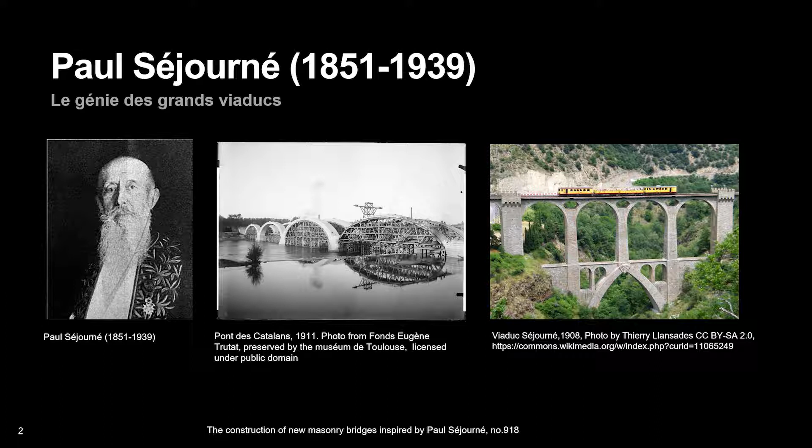Séjourné was a French civil engineer, and is mostly known for his innovations in design and construction of masonry bridges that were built during the first half of the 20th century. And many of his bridges are still standing today.

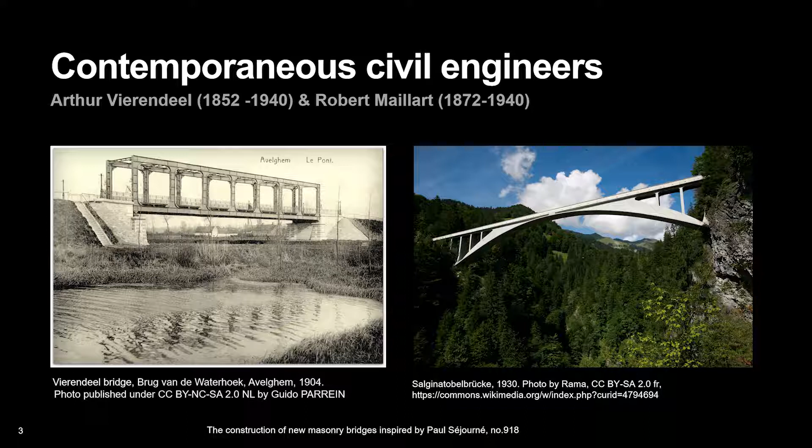Historically, Séjourné's work may have been overshadowed by other well-known civil engineers active at the same time, such as Maillart and Vierendeel, who both pushed the design of bridges in materials that are still considered more modern in steel and concrete. However, Séjourné wrote maybe one of the most extensive works in 6 volumes on masonry bridges and arches, Grandes Voûtes, and also an article on 50 years of progress in the art of designing and building large masonry bridges in 1930.

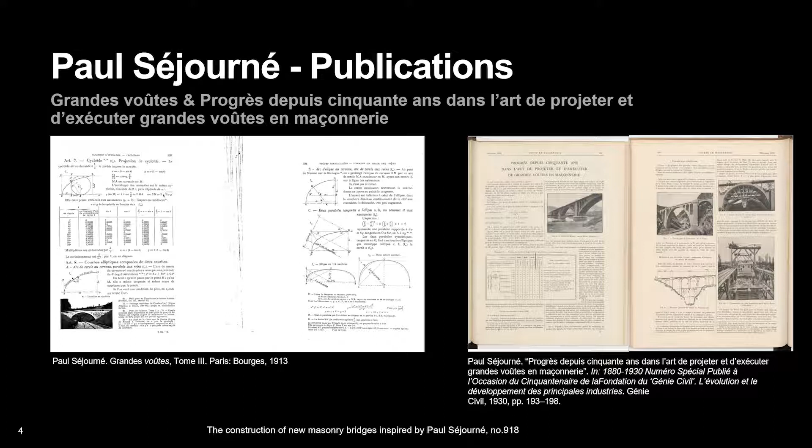Séjourné writes some advantages of masonry compared to concrete in being able to predict the crack patterns and the ease of repair. In concrete, it is difficult or impossible to predict cracks and repair it, he states. However, since the First World War, the manpower has become scarcer and more demanding and less good, he continues. And there are few apprentices, thus making it difficult to build good masonry bridges.

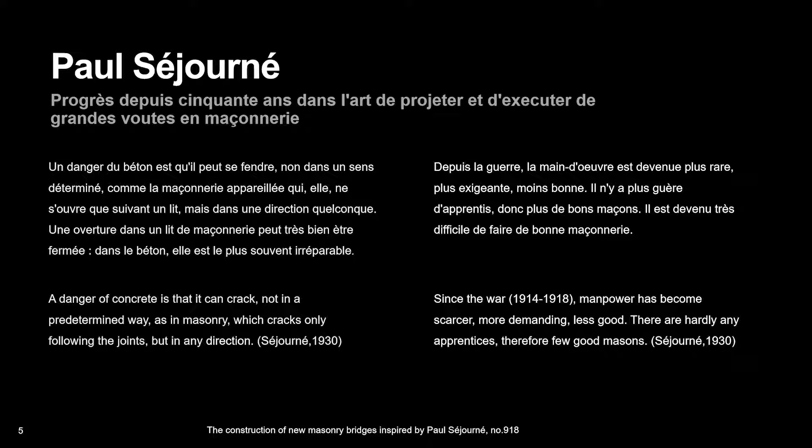Thus, why would there be a future for new masonry bridges, since they are considered expensive to build, and our knowledge and skills relating to the design and analysis and construction of these bridges are still limited. However, there are aspects concerning sustainability that might make us reconsider masonry bridges. One such aspect is that many masonry bridges, such as the Maidenhead Railway Bridge, are still in use and have performed well over time and require relatively little maintenance compared to modern bridges.

And if one looks inside, many of these bridges contain quite a lot of fill material between the arch and the spandrel walls. It can be earth, soil, or stones. At least in Sweden, there is a debate regarding how to handle fill material generated during large infrastructure projects. Using it in the design and construction of new masonry bridges could be one option.

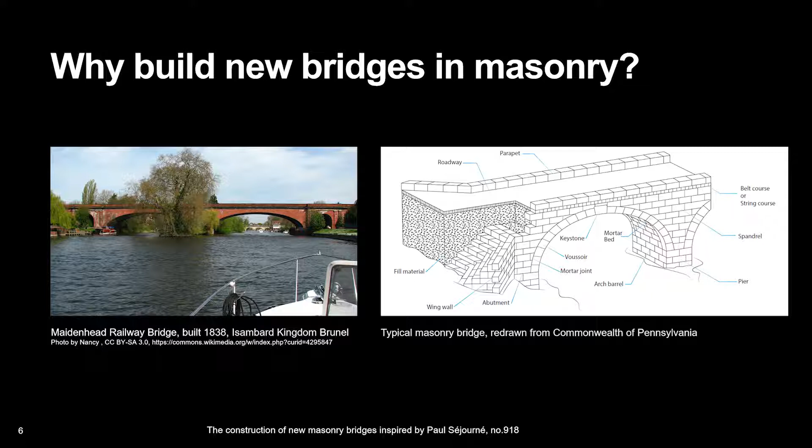The fill spreads the load from the road on the arch, and the weight of the fill stabilizes the arch. So from this perspective, the more fill the better. On the other hand, from the point of view of foundation, the less fill the better. So it will always be a compromise. How does the fill affect the form of the bridge?

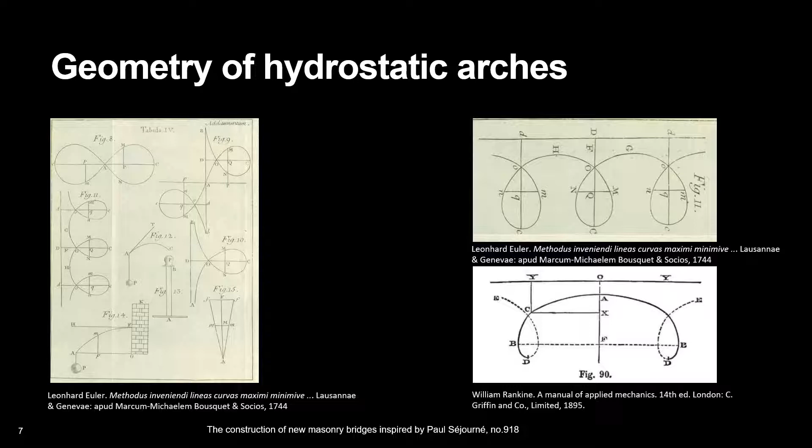If we assume that the load from the fill on the arch is hydrostatic pressure, and we ignore the weight of the arch in comparison to the fill, then the curvature of the arch must be proportional to the vertical distance. The shape of the arch should therefore be that of Euler's elastica. This is also illustrated by Rankine in his famous book, A Manual of Applied Mechanics. Thus, the elliptical-shaped arches with increased curvature near the supports to balance the load from the fill, seen at the Maidenhead Railway Bridge, and to the right, a bridge by Séjourné.

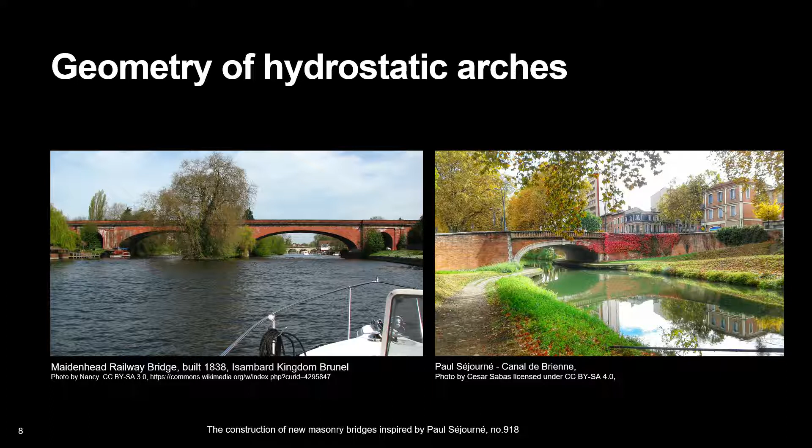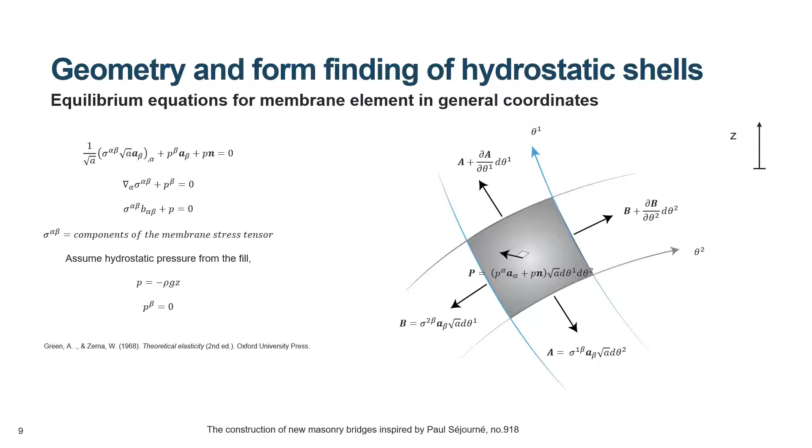The knowledge regarding hydrostatic arches is well known. However, the objective of this paper is to derive the shape of the hydrostatic shell, combining the arch and the spandrel wall. Starting from the membrane theory in general coordinates, assuming hydrostatic pressure from the fill, we then align the principal stresses with the geodesic coordinates, which is a special type of curvilinear coordinates on a surface, where the coordinate curves are geodesics in one direction and orthogonal trajectories in the other. With those geometrical constraints on our grid, we can reformulate the equilibrium equations for our membrane shell.

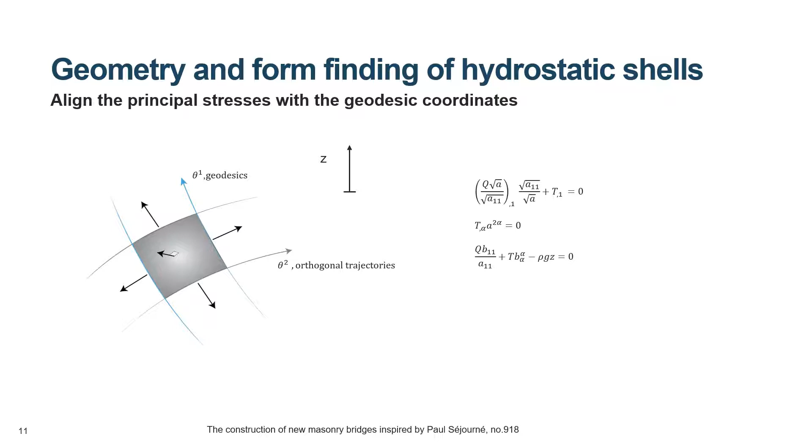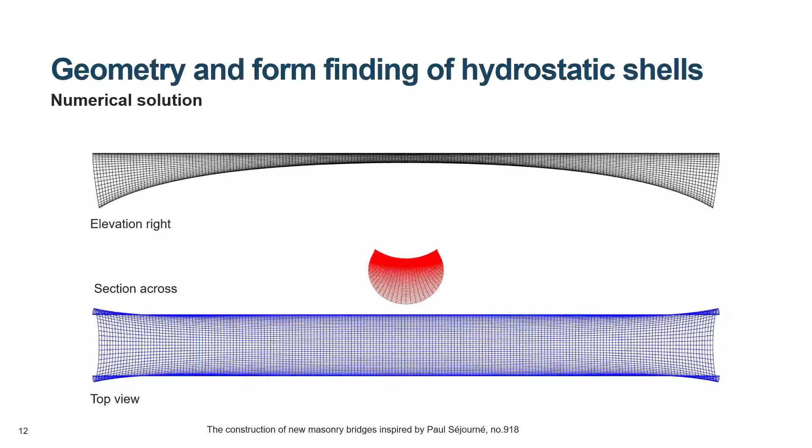We have solved this numerically, generating the geometry by starting from a chosen cross-section in the middle, perpendicular to the span. Then one can calculate the necessary normal curvature of the geodesics, which is in the direction of the span, to balance the load from the hydrostatic pressure. Since the principal stresses are aligned with the geodesic coordinates, the orthogonal trajectories are equally spaced, similar to bed joints in a masonry or brick vault, which can be a useful feature for fabrication and construction.

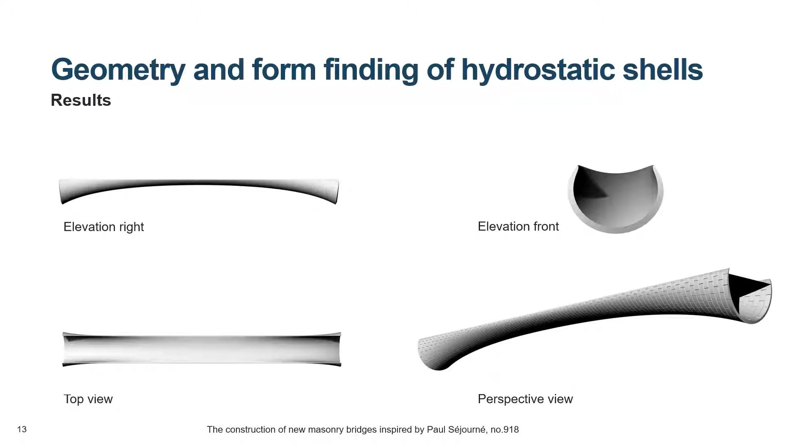In this study, we have looked into the works of Paul Séjourné and Brunel regarding masonry bridges interacting with the fill. We have investigated the optimization of bridge geometry to carry the approximately hydrostatic loading from the fill. However, the form finding is only the starting point in the design process, followed by further analysis considering more load cases and actions on the structure. Possible future studies include investigating geostatic arches and shells and performing experiments on physical models and prototypes to give more insight into the structural behavior and construction of these bridges to develop our concept further.

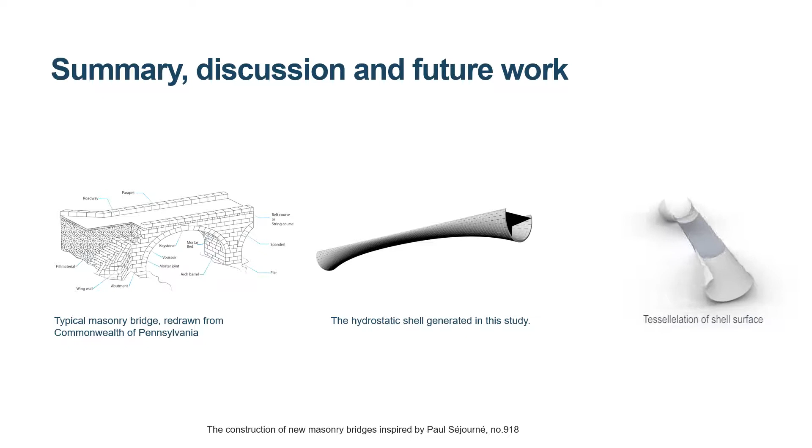Many masonry bridges designed and built more than 100 years ago are still in service, carrying trains, cars, and people. They have often proven more durable and more economic to maintain than modern bridges. Thus, masonry bridges can be considered sustainable structures in this regard. And civil engineers of today and the future have the challenge of working with local resources to produce durable solutions. Hence, designing efficient structures utilizing soil or fill is one of the viable alternatives to contemporary practice for sustainable civil engineering for the future.

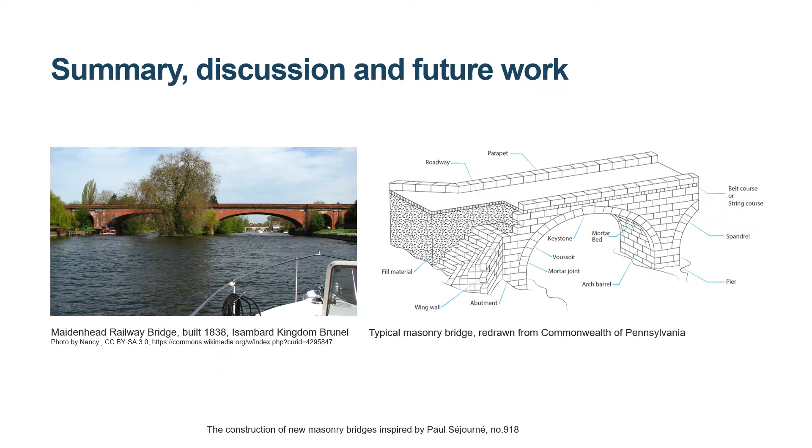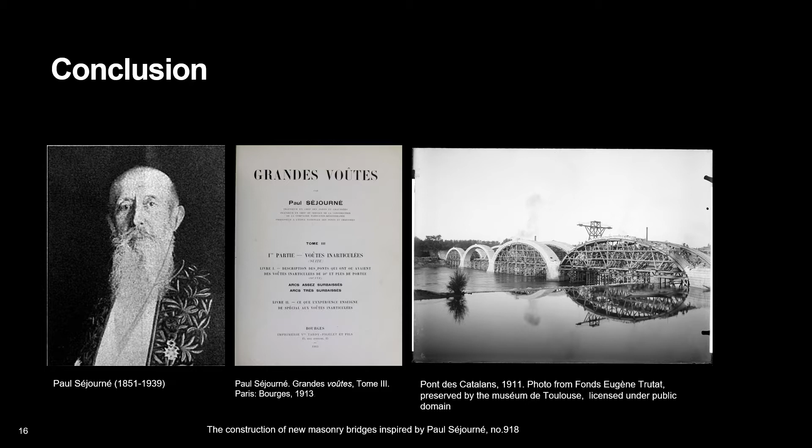With that said, perhaps we should now revisit Paul Séjourné's work to see if we can start building masonry bridges again. Thank you for listening.